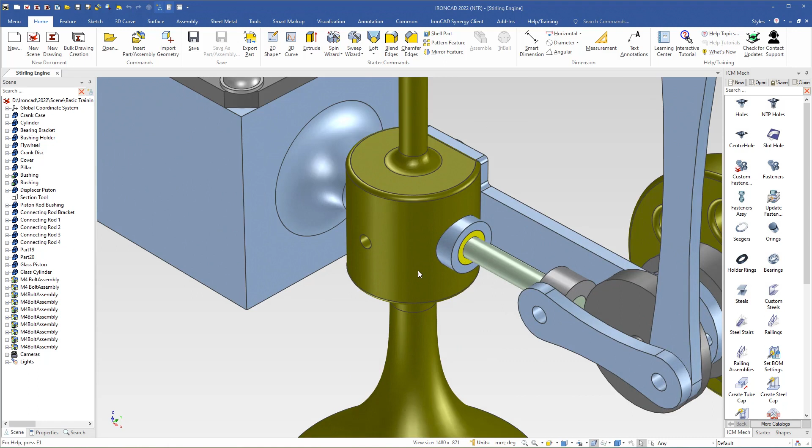We will now fasten the crankcase to the pillar. If we zoom in and look at the pillar and the hole, we see that the threads are gone. That's because we painted the pillar with this color, so the image of the threads is not visible right now. But the hole itself has the right information: it is an M4 hole.

To bring back the image so we can see the threads, we have to select the hole in the IntelliShape level. A quick way to do that is to press Alt and left click inside the hole, then right click, and down here click on Add-on Properties. The menu will show up, and here you can select Apply or Update, and you will see the threads. Then I will click Apply and Exit.

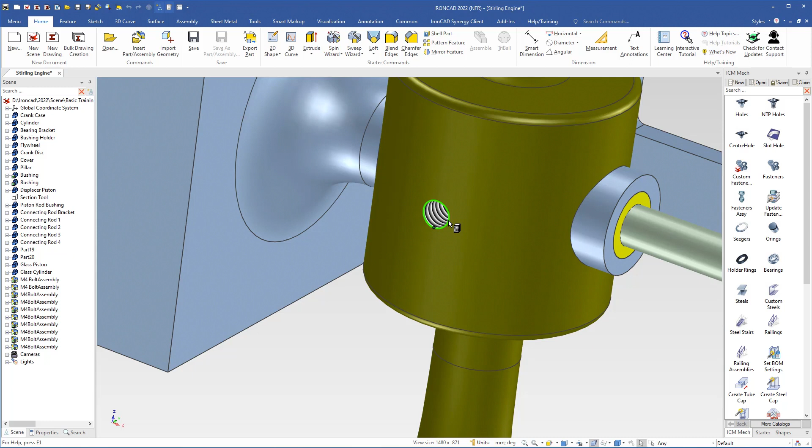To fasten the crankcase to the pillar, we will use Fasteners SE. I will drag a Fasteners SE and use the Shift key to snap it to this edge. If you snap it to the center of the hole, the screw and washer will turn the other way around, so I will snap it to the edge, drop it here, let go of the mouse button and Shift key, then grab this handle to drag the screw and washer.

Then I will deselect the axis by clicking outside the TriBall, right click this handle, and choose parallel to axis, clicking here inside the hole. Then I deselect that axis by clicking outside the TriBall and right click the 2D handle, and here I choose to center point, clicking here inside the hole.

Then I will select this axis, right click, and choose to point, and I can choose this node or this node. It doesn't matter which one, but I will select this one, and now the screw and washer are in the right location.

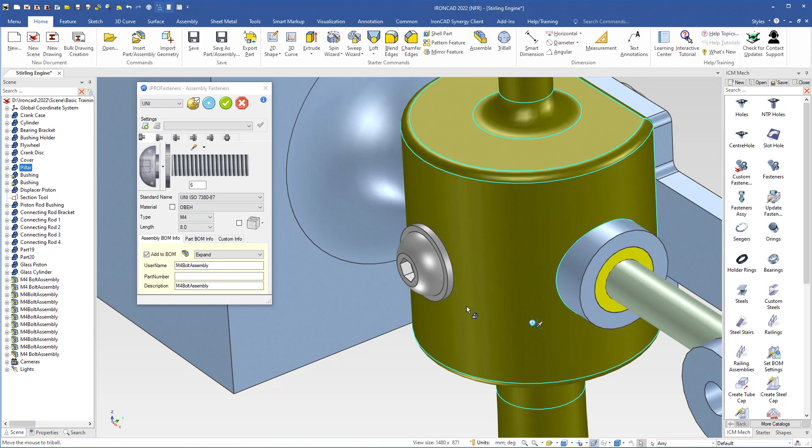Now we have to check if the screw has the right length. I will turn off the TriBall, then select the pillar so it is selected in part level. Then I come over to the properties, and down here we have the settings for transparency. I will grab this slider and drag a little so we see the screw inside the pillar, and we see that the screw is too short.

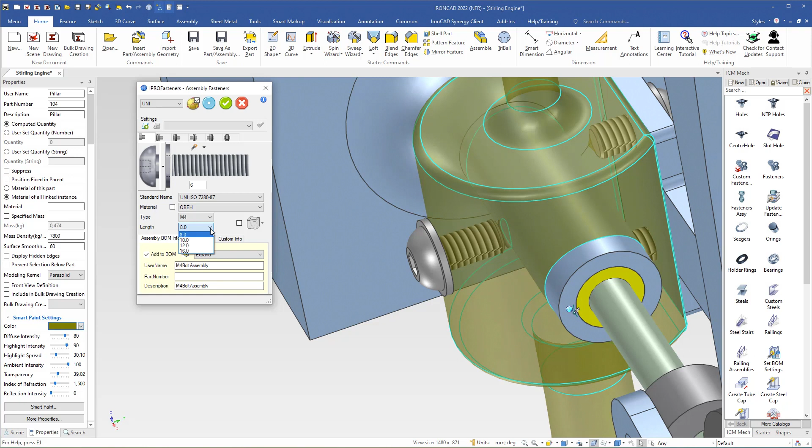So we have to change the length of the screw, and we do that here in the menu. We select it and change it to 10, then update, and now we see that the length is fine. So I will click Apply and Exit.

When the pillar is selected, I will come down here to set the transparency back to 0, type 0, hit enter, then click here in the scene to update the scene.

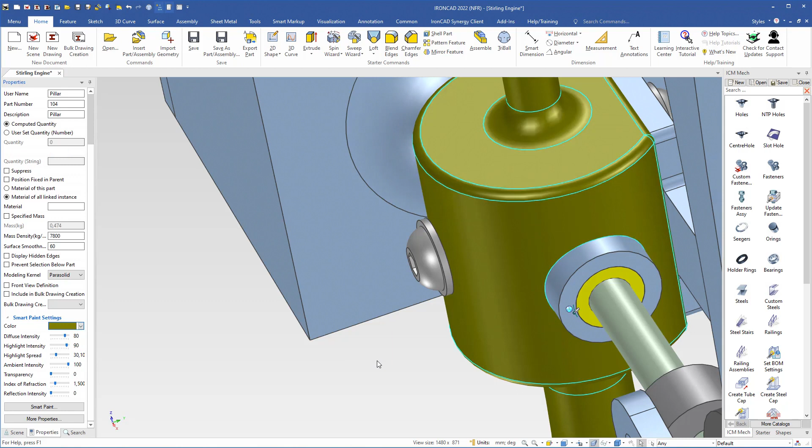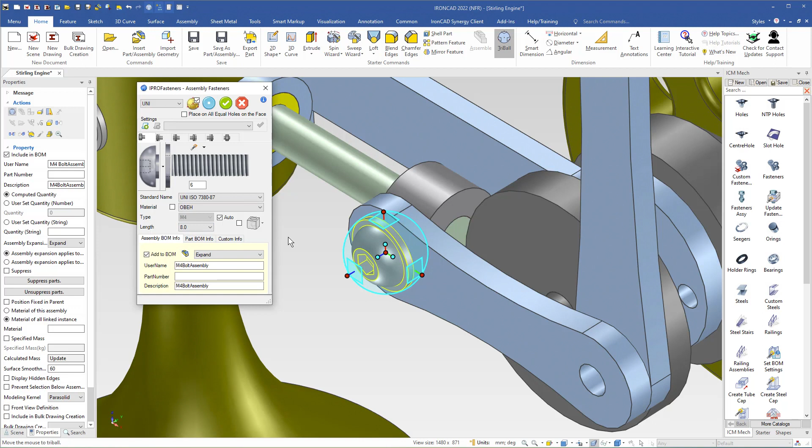Then we will add a Fasteners SE here as well. I will drag another one, drop it here in the center, and we will use M4. This one will not be checked, but this one will be added to bill of materials, and the length will not be 10 but 8. I will update, click Apply and Exit, and turn off the TriBall.

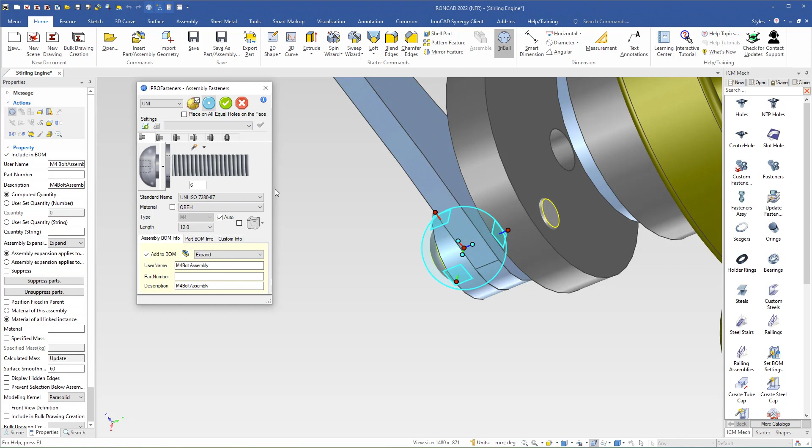Then I will deselect the assemblies before dragging another assembly into the scene. I will drag another Fasteners Assy here, drop it in the center, and this screw should go through the connecting rods and the crank disc. So I will change the length here to 12 and update, and 12 is fine. I'll click Apply and Exit and turn off the TriBall.

Then I will deselect the assembly. Then we come up to this side of the pillar, drag another Fasteners Assy, and we will snap to the edge. We will turn on the TriBall and drag the screw and washer so that we see the whole screw.

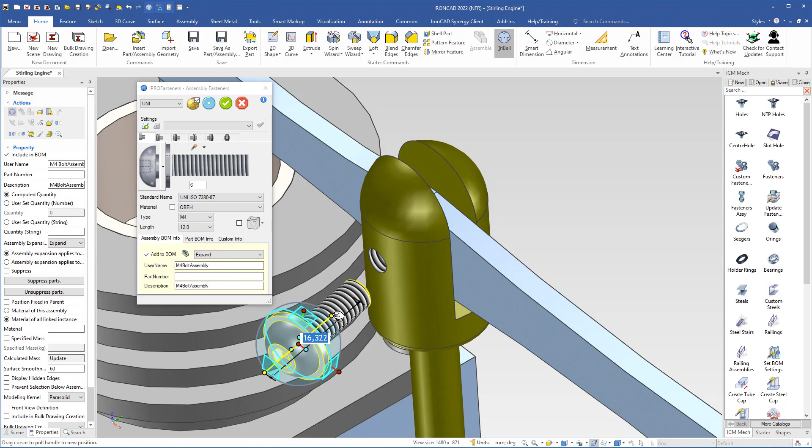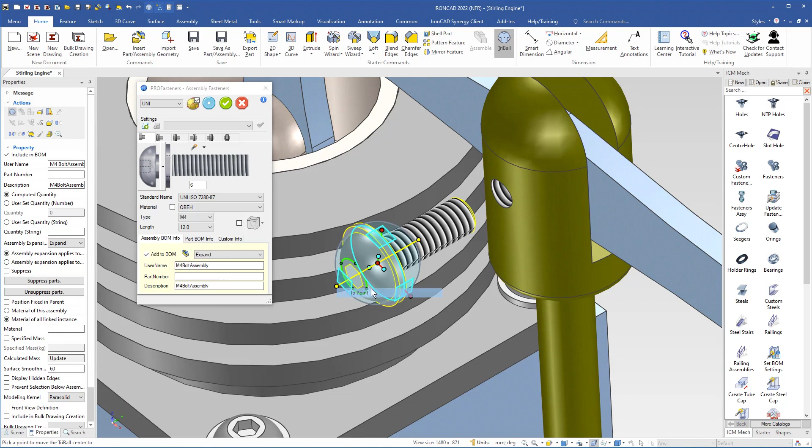Then we'll deselect the axis by clicking outside the TriBall and right click this orientation handle, choosing parallel to axis, and click inside the hole. Deselect the axis again, right click the 2D handle and choose to center point of the hole. Then I will select this axis, right click, choose to point, and choose this node.

This screw should go through the pillar here, so I will change the length to 16 and click update, and the length is fine now. I will click Apply and Exit, turn off the TriBall, and deselect this assembly.

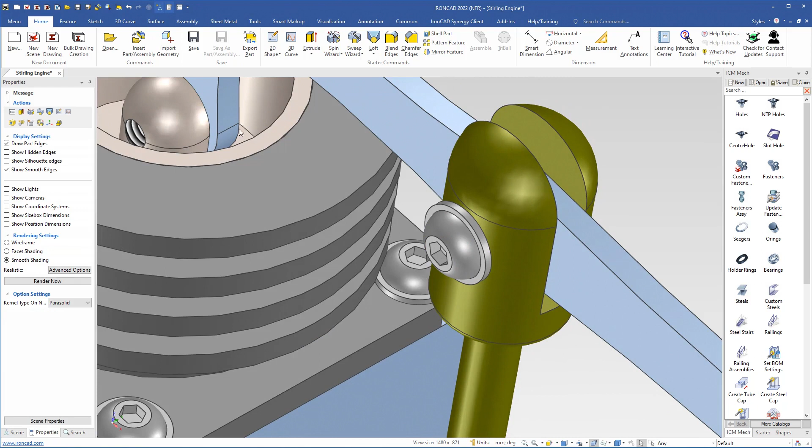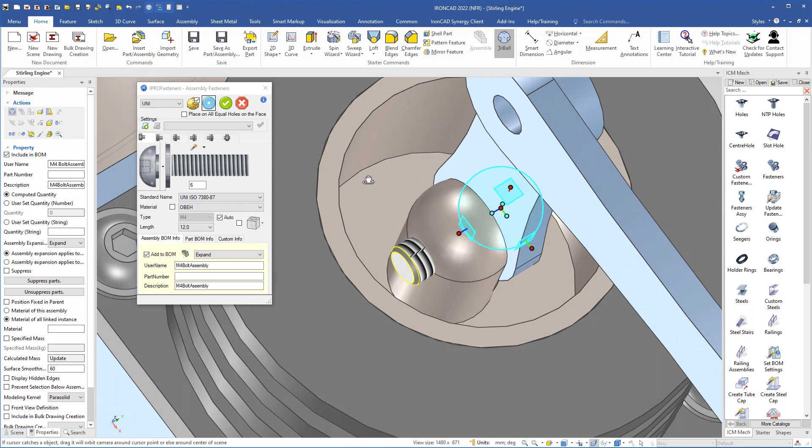Next step is to add a screw in the washer here. I will drag another Fasteners Assy, drop it here in the center. 16 is too long, so I will change that to 12. Apply — 12 is fine. So I will click Apply and Exit and turn off the TriBall.

Next we will add another Fasteners Assy here. So I will grab one, drop it in the center, and here we need a washer and a nut on this side.

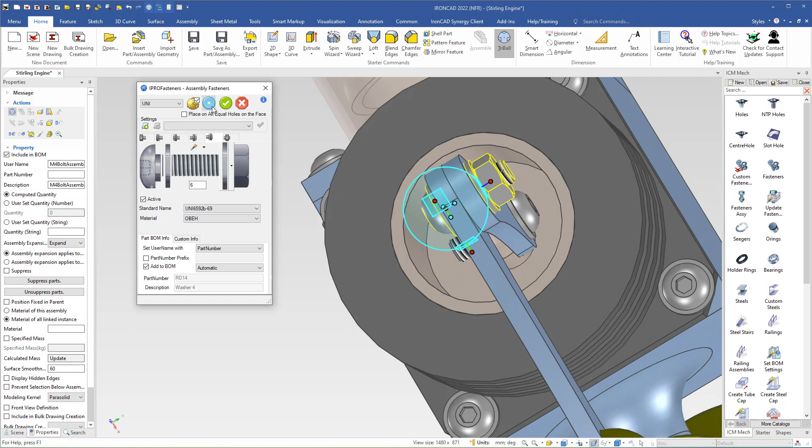So we come over to the menu, we need a nut, so we click on this button, and here we click active, and we choose this washer, and we click active. Then we update, and it fits perfectly, and that's because I have the value 6 here.

Perhaps you have 10 millimeters, and I will update here. Perhaps it will look like this for you, but the distance between these two washers is 6 millimeters because the connecting rods has a thickness of 3 millimeters. So together it will be 6.

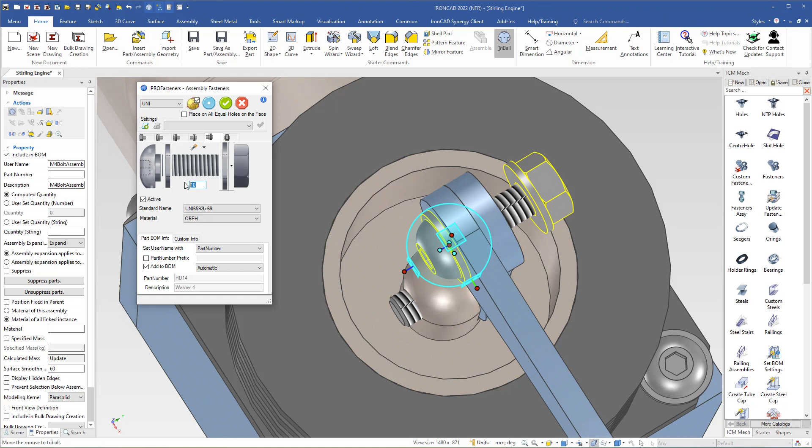So that's why we have to change the distance here to 6 and update, and the washer and the nut will be placed in the right location. Then I will click apply and exit and turn off the tri-ball.

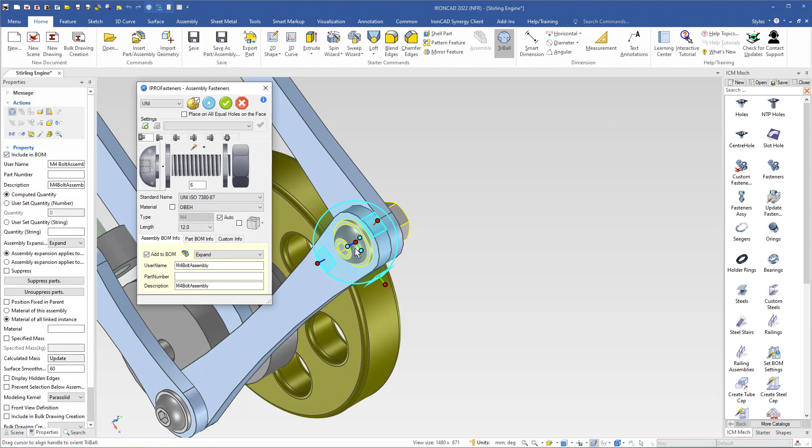So we go over to the other side here, make the same procedure, and drop a Fasteners Assy here in the center. And now, because we have already added one on the other side, this one will fit perfectly. So I will click apply and exit and turn off the tri-ball.

So now we have added screws here and washers and nut and a washer on all these, but we have to fasten the bracket to the piston.

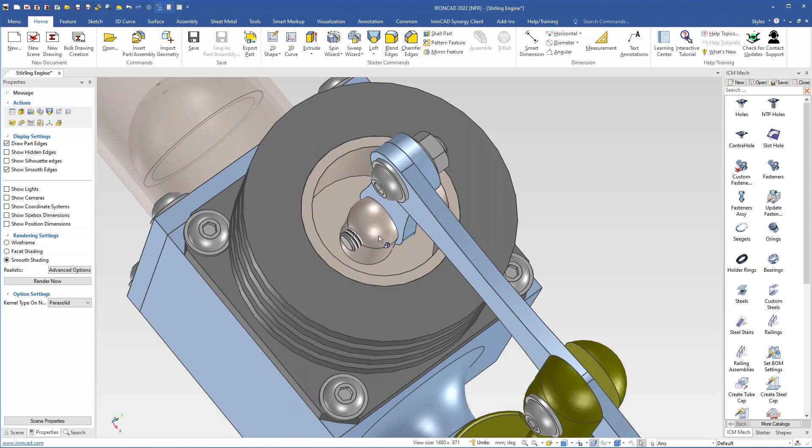So we will select the bracket and shift select the piston, and then we will hide unselected. We press Ctrl Alt Space, and I will select the piston and change the smoothness. So I come down here to change the surface smoothness to 60 and hit enter.

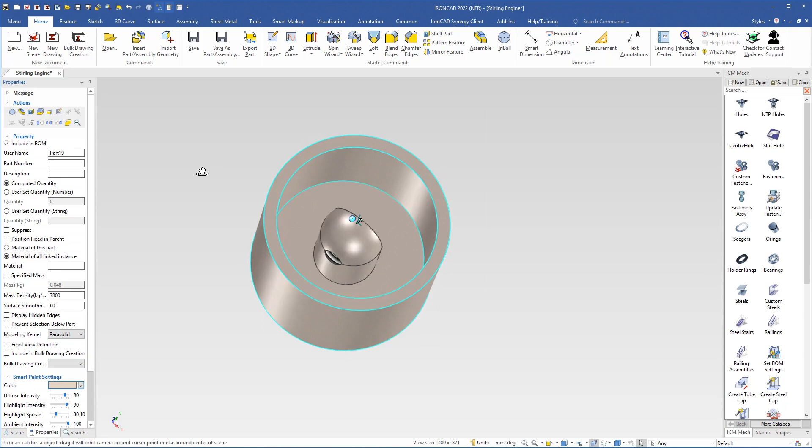So now we need to add a screw here and also a countersink hole and a threaded hole in the bracket. And we will add all at the same time by using a fastener.

So I will drag a fastener and I will drop it here in the center, and we got a large one. So I will change the size of this bolt.

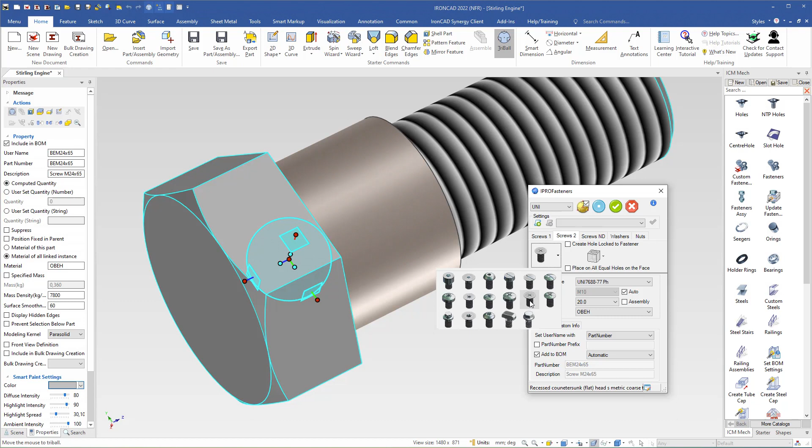First of all, we will go to Screws 2 tab, and here we will select this one, this screw. Then we will update, and it will look like this. And it's too large, so we have to change the size of it.

We uncheck this box, Auto, and change from M10 to M4. Update, and the length is too long, so we will change the length to 10 and update.

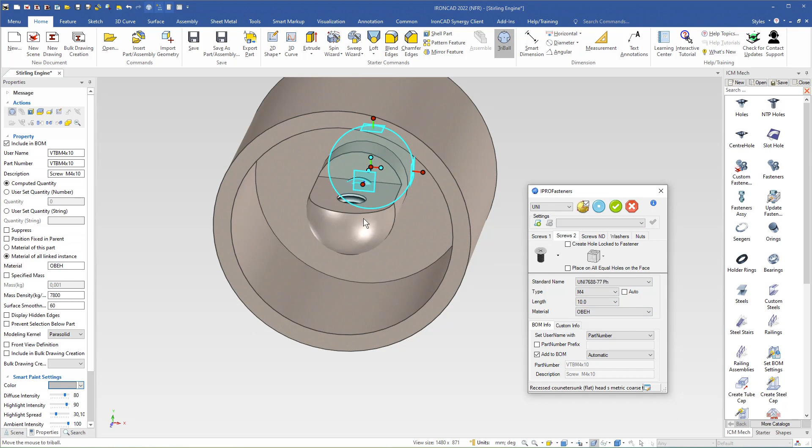Now we will add a hole here on the piston and also a threaded hole in the bracket. So we come over here to check this box, create hole locked to the fastener.

So we will click this button to get this drop down menu, and here we will check or select this countersink hole. This one should not be used, and here the last part, the bracket, will have this drilled hole, a threaded hole. So now when we have these settings set, we can click update.

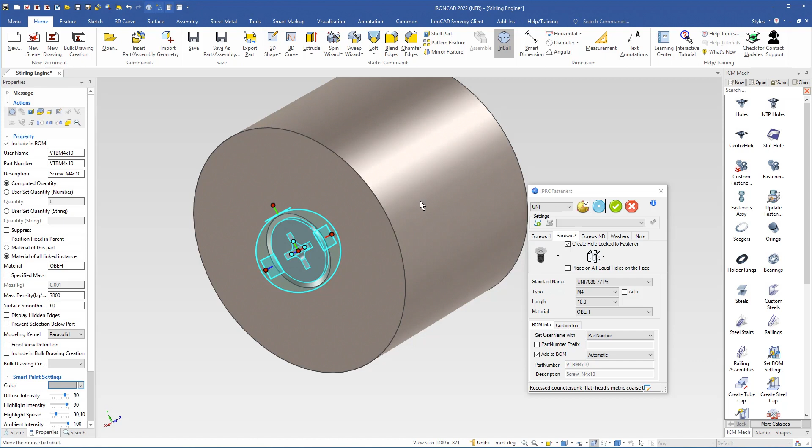Now we see that we have got a hole, a countersink hole, and here we have a threaded hole.

So now I will click apply and exit and turn off the tri-ball, and I will select the bracket, and I will hide unselected by pressing Ctrl Alt Space, and we see now that we have a threaded hole in the bracket.

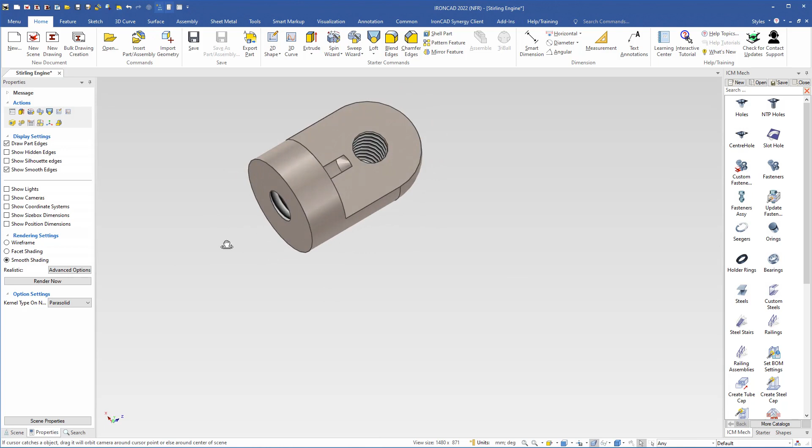So I will bring back all parts by pressing Shift Space, and I will also select the cylinder here and change the smoothness to 60. It will look a lot smoother.

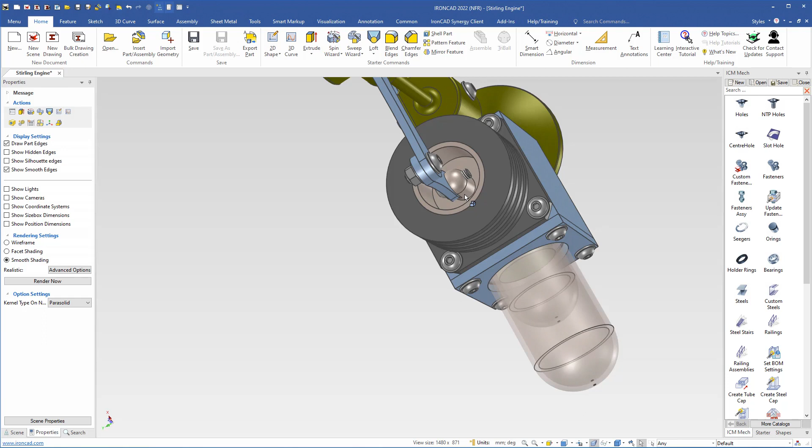So now we have fastened all the connecting rods and the crankcase and this bracket. So I will select this piston. Here in the properties we will type the name piston.

Hit enter and we copy the name, paste it here, and the piston will have the part number 110, and I will change the color to this gray color.

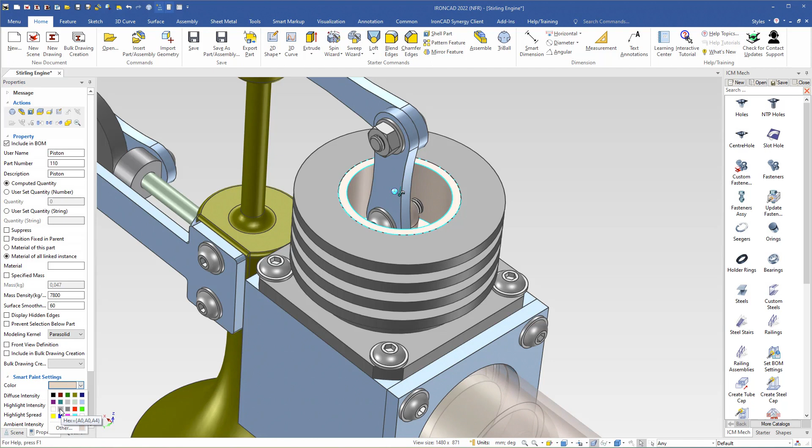Then we select the bracket and we type joint bracket here. I'll copy the name, paste it here, and the part number will be 111.

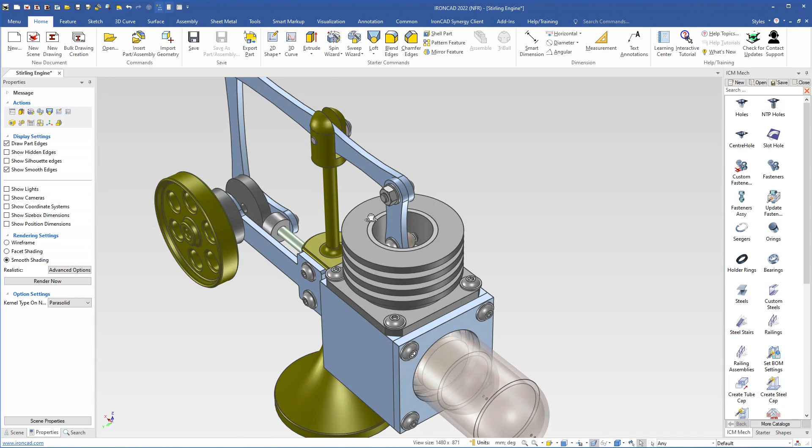So now I will move the camera to top front right and fit scene, and then we will save the scene and we will continue in the next video.